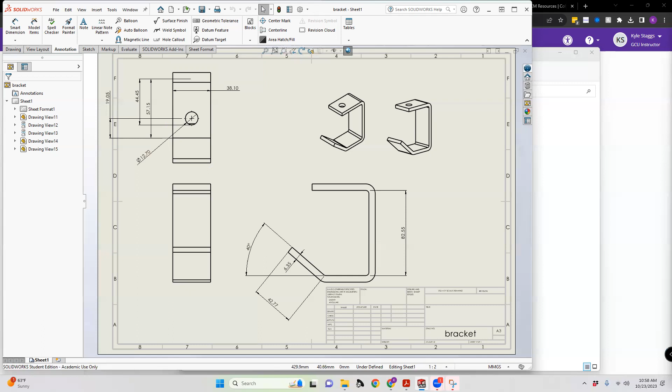And that way you guys can actually access them, and that might be a little bit easier, because the default is you have to save it as a drawing first, then you can save it as a PDF, because reasons. So I'll pause this for a second and do that real quick for each of them so that you guys actually have the PDFs, and then I'll update in the class what that needs for that one.

All right, so starting from the PDF, we can see a couple of our key dimensions. Have to move our toolbar a little bit out of the way to make sense of it. But what this is going to do is give us our starting point, which should be something about here roughly. I'm going to narrow this just a bit to make life a little bit easier, be able to see a little bit more of what we're working with. And this way I can switch back and forth between some of the different drawings a little bit more easily for the purpose of the recording.

So you want to start with the base. It's kind of an important piece of it, and you'll see why shortly. This is meant as a mechanism to retain the U-joint. So this bracket is pretty straightforward in terms of how it gets created. Number of different ways that you can do it. You can do just a simple line drawing. We haven't done a lot of those, so we'll do this from the front plane, and I'll make adjustments to our view. So we'll start at the base corner.

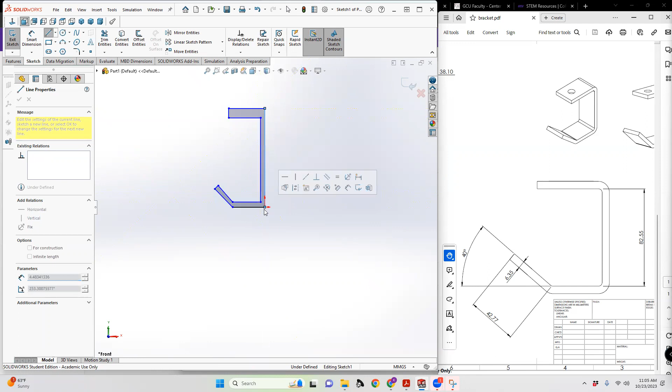Want something that is parallel, and we'll do some rounding later. So we get a rough geometry set up. As a starting point, come in and use smart dimensions. 82.5 millimeters or 82.55 millimeters is the interior distance plus the exterior thickness. So 6.35 plus 6.35 for the thickness on top as well.

This is why when you get to learn GD&T later from folks who could tell you what that stands for, I say in jest, you have a lot of options for how that can be done. You have a lot of options for how these things can be treated. But at the end of the day, what you want to make sure of is you're accounting for all of the tolerances for all of the parts that you're paying attention to. So we need to likewise make sure the distance here is 6.35, because otherwise that'll create issues with the part on the hole. So this length here to here, 42.77.

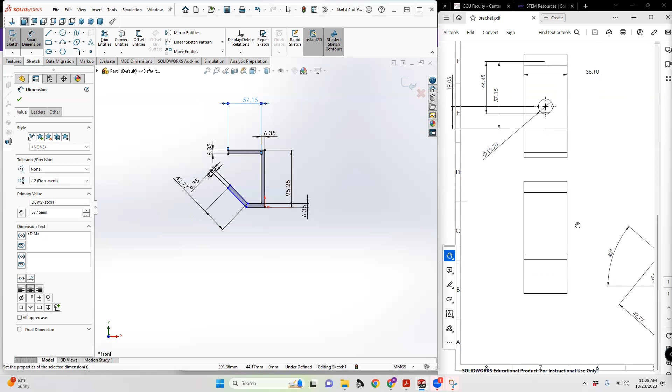And that means we can, from the rest of this, get some of the information about how far out this actually goes, because you see what the relative ratios are. And so you know that very likely this leg has to be about the same overall distance as this front leg, or very proportional to, because we're still way outside of the desired ratio here. So 57.15, and then what we need is this interior dimension.

And because this is approximately symmetrical, you could do some additional measurements. This might be one of the dimensions that they leave off on a part, and so you have to scale it. And so let's take a look at what 42.77 looks like. So that looks like that comes down right about the center line, or just above the center line. If we did the same thing, that would come down just above the center line. So that dimension is probably about correct.

The reason that it doesn't automatically display is when you're using these sections, and you're using some of the autofill dimensions from the part, if you have radii and things, it will default to taking some interior measurements and not giving you all of the detail there. So those are important ones to note.

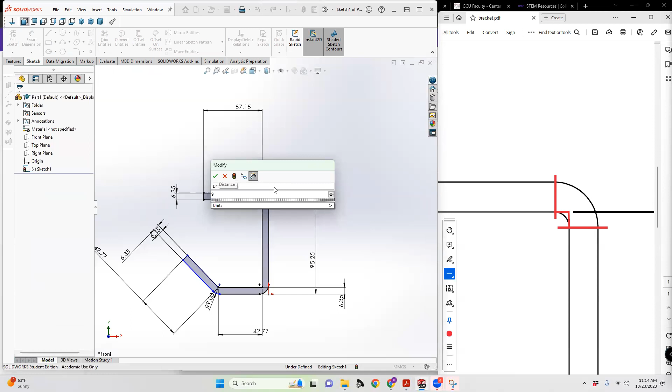So if you have a radius here of 9, for instance, I think you're pretty close. 9 minus 6.35 is going to be the next radius. So this one is going to be 9, and this one is going to be 9 minus 6.35, so that you can take into consideration those two. So then what you have is the two lining up and looking identically placed, right, with about the same thickness. Those two would line up.

So this is how you can do some quick estimation if somebody gives you a drawing and they haven't necessarily given you all the dimensions, like in the assignment, where we're not going to give you all of the dimensions because we're mean that way. What that gives us is the operating parameters. So somewhere around 9, it might have been 9.35. It had to be more than 8 based on this, but this gives you what I keep referring to as an aspect ratio.

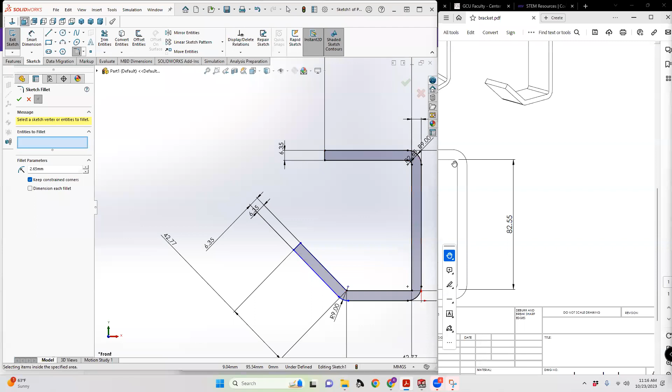So if we look at this side by side and we bring this in, those look virtually identical, and that's why. This one, same thing. It's also going to have a radius of 2.65. And then this interior has a very small bend, so it's also going to have the same radius, but very, very small. So now we have all of our radii accounted for. We have our dimensions, and we figured out the pieces of information that we're missing based on the aspect ratios, how big something is relative to something else, right? So now we need our top piece and we need to do our extrusion.

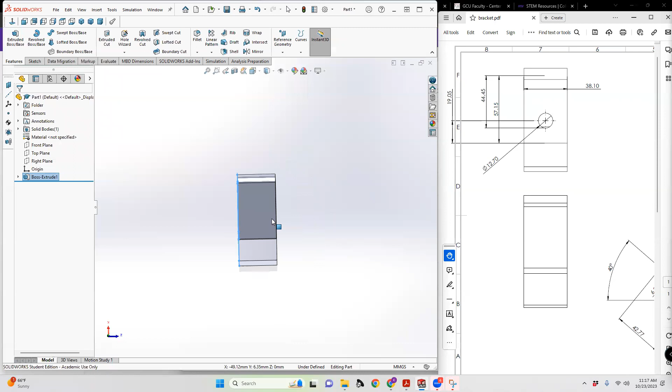So we're going to jump out of the sketch fillet and we're going to extrude first. And our extrusion width is 38.1. So 38.1. And I'm going to square this up for a top view. So what we're doing is we're now recreating this. Note that the bold lines are the things that are closest to you. The faded gray lines are a little bit farther away. So those are important things to incorporate.

So now we need one more sketch. We need it to be on this top plane of this part. And we need to jump from one edge to another, but we need a center line from which to do it. And there's a reason that we want a center line, just because this gives us a really solid anchor point. We can use another center line somewhere. I don't want to associate it with any other points, center lines, corners, fold lines, or any of those things. I want to be able to control the dimensions so that I can get this 19.05 spacing that I'm looking for.

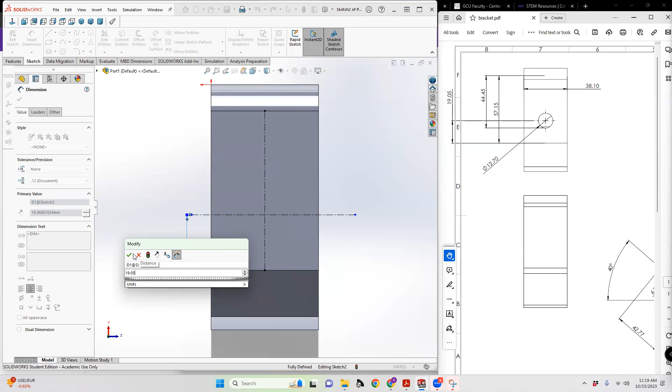No, that is not the smart dimension I need. Every once in a while, SolidWorks likes to help. Or if you buy a mouse on Amazon, sort by cheapest, sometimes you get a double click when you don't need it. All right. So 19.05. And then we need our through hole that's going to be at that intersection with a diameter of 12.7.

So now we can do our extrude cut from the sketch plane, which is fine. But what you want to do is change it to up to next so that you're not doing a through all and messing up the mass, center of mass of the part, etc. For this purpose, we're not necessarily going to be changing the material for this one. What we're doing is just creating each of our individual parts so that we can make an assembly.

So this one's done. We save as, and then we say, let's do, I'll bring it to this semester's folder. And I'm going to create a new folder because this is going to contain all of the parts. This will make it easier to find stuff later. It's not just a random assemblage, it's an actual group of part files all together. So this is the bracket. This is the first part. We're going to create a couple more pieces.

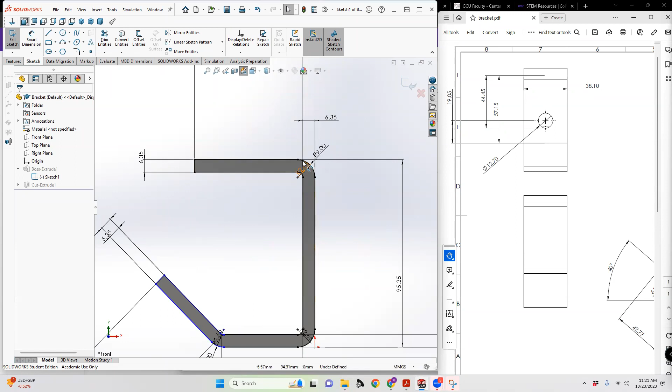The fillets, this is part of the reason why I wanted to make sure all of the details are in the recording, because the fillets themselves, what I did were sketch fillets. You could do the fillets after the fact as well, but it's going to be easiest to visualize here. What we were doing in terms of reference was taking a careful look at the part and inspecting some different radii for things. We found that 10 was maybe a bit aggressive.

10 is a little bit too far toward the top of the part. Based on the interior thickness, we can estimate what that thickness needs to be pretty closely. And that's why we needed to zoom in to see where the lines actually start curving. So from here, it's not quite a third of the thickness, a little bit less, to be able to figure out what these radii were. And the difference is we need to be able to measure.

We need to be able to measure. So from here, I'll do it in red so it's very clearly visible. In red, we have our semicircle here. So this is an arch. We know the distance from here to here. I'm going to do this in green. We know the distance from here to here is 6.35. We know that's uniform throughout the whole part.

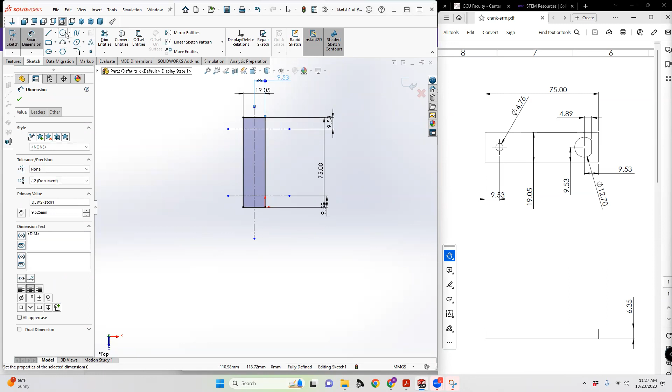So we zoom in and we have one. We zoom in, we have another. And then from this, we have a line that we generate. We're not going to associate it with any other points or references except being horizontal. And we're going to set the distance from the line to the center as our 4.89. So then we come in, trim out the unnecessary sections, and we're left with our D-shaped crank hole. And this is a radius of 6.35.

This one will only give you radius because it's an arc at this point. So it's not a full circle. You can't specify a diameter once it's already been cut. Just one of those things to note. If you're trying to figure out how to do something, remember you can always divide by 2 or multiply by 2 to get back to the number you needed. So we extrude this by 6.35 millimeters, and the crank is done.

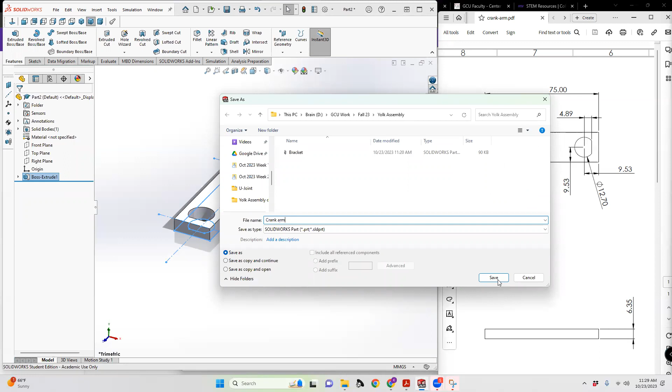So now, this is the crank arm. Okay, so this one can go away. This one can go away. Then we also need the crank knob. I'll go ahead and open the rest of these, because then we get to basically do an intensive lesson in how the assembly mates work for a multi-component assembly like this. And that's why I chose this example for today.

So there's a lot more detail to cover. This one is a little less obvious how to proceed. It tells you some things, but you have to figure out what things it's telling you. I left these intentionally a little bit unclear so that you guys had to think your way through what this looked like. A lot of times we're going to use a given radius or range of radii for a part to do something. There's a couple of ways that you can approach this. The first is you can do a bunch of extrudes and extrude cuts, but can you guys think of an easier way to do it?

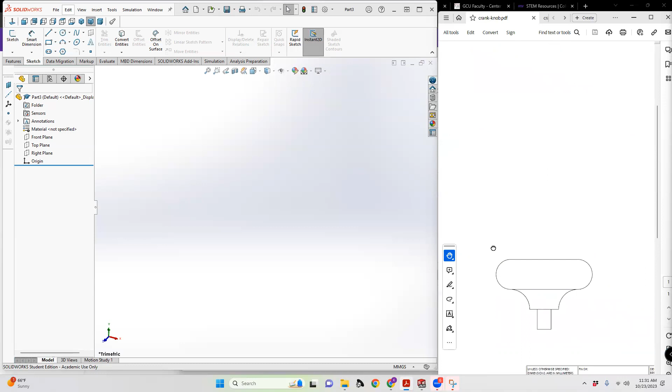What's this an ideal candidate for? Before you guys think in terms of, I'll just extrude a bunch of discs and then do some filleting at the end. What's a better mechanism to use? Yeah, exactly. A revolve extrude, because you can get most of what you need in terms of the geometry and it's symmetrical. The reason you know it's symmetrical is comparing the side view and the front view, and both are identical. So this is a symmetrical part, which makes your life a lot easier.

So you start with a center line along a front plane. All right. Recenter your view so that you've got an idea what you're working with, and then draw half of the part. So you know that there is, and this one can be done freehand. We'll go ahead and do that so that you can see what it would look like. Here and here and here and here. Okay, so this is your freehand line drawing of this.

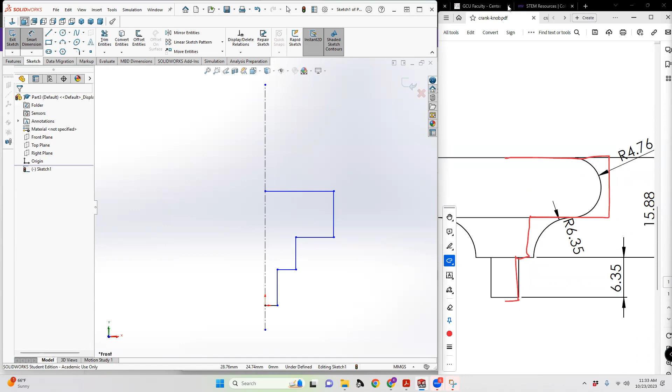And I'll show, just for the sake of completeness, what the goal is there. I'm focusing in on this half where I've got this line. I have this box coming back to this line, coming back down, and coming back down again. And this is the half that I'm drawing so that we can bring in the radii later, because all I need is a few of the key dimensions. So I'll go back to the pen so that you can see what's going on there.

That means that I know what the height difference is here to here. So here to here is 15.88. And I know here to here is 6.35. So there's a bunch of these dimensions that you'll recognize from some of these other parts, in terms of some radii and things. That's to make the actual end part a little bit more uniform. There's a bunch of reasoning behind that, actually, but there's good reason for it.

Now, they don't give you the overall diameter of this, because in the part drawing, what they're going to do is give you a couple pieces of the information, but not all of it. So one thing we know, for instance, is this radius is a sweep of a full 90 degrees. That gives us some very important information. So this here, we can start by, there's a couple different options, but the easiest way is going to be not to go ahead and move it.

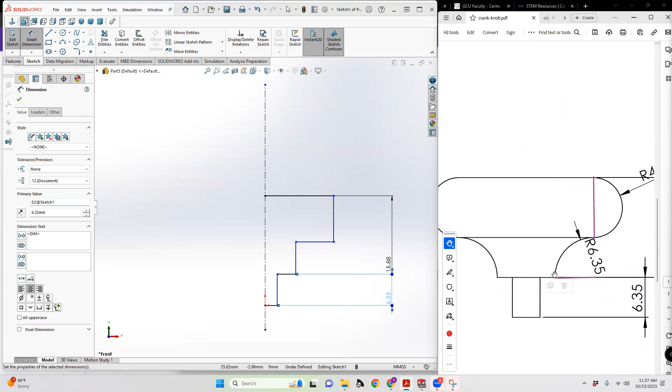And if we know that radius, then we by default know what the rest of it is, based on the other things that we've learned. So we're going to set this first. We're going to set the distance between the center line and this point as 4.76. Then we're going to set this arch because we know, having just built the part, what dimension this pin is going to need to be. So 6.35, you should recognize from the last part. Somebody go back and look at that part drawing and see what the diameter was of that pinhole. And I think you'll find the other answer that we're looking for there. So this point is going to have a sketch fillet. It can't be 10 millimeters, but we know it needs to be 6.35.

I'm going to clear selections and use it here. There we go. So we know that goes through a full 90-degree sweep. 6.35. We know this is spaced correctly. And we know this arch now. We can make the distance between this and this to be 0. So what that does is that effectively eliminates that center section.

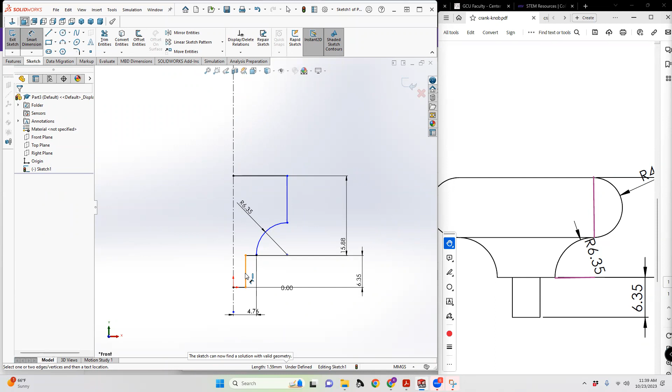So now we have our 6.35. And we know, based on that crank arm drawing, what the diameter needs to be, because the diameter itself is this 4.76 right here. So we know this has to be 4.76 divided by 2, and that locks in this dimension. So now we have this radius. Now we have the upper arch that's going to give us what we're looking for in terms of the radius.

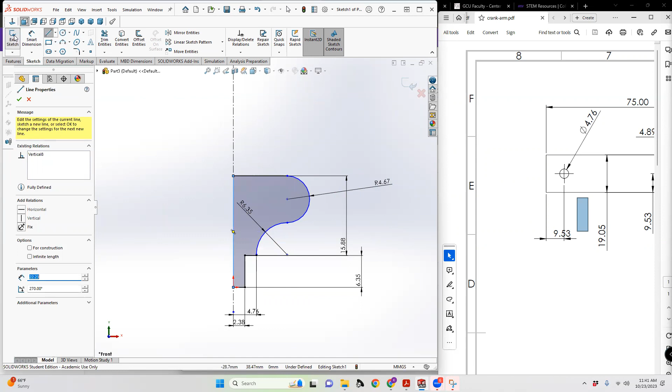And what we're going to do is we're going to do both ends. So 1, 2, and then 3 happens to give us our radius of 4.67, because this arc has to be 90 degrees based on the relations and the constraints. So now we eliminate it, and now we have our revolve. We're going to go ahead and connect this so that we have an enclosed area. But what that does is that gives us enough now that we can do the revolve and give us our part.

So we have our knob. We'll change the material on this one just to distinguish it. We're primarily concerned about the appearance. So maybe we'll do something like a beryllium copper, give it kind of a nice red color. I've seen that referenced in a couple of those drawings. Yes, we need to save that.

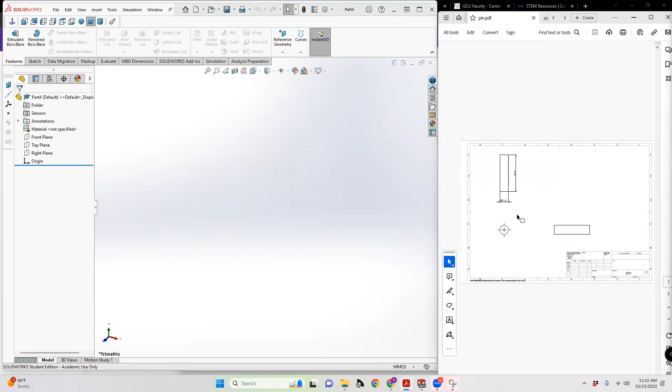So we've got a few more pieces. This one we don't need open. This one we don't need open. This one I'm going to leave open in case we have to make a minor adjustment because of constraints. I don't think we will. But let's go back to the pin. We'll need 2 of those. We only need to make 1. This one's going to be super duper confusing.

All right. So 9.4 over 2. Extrude to 38.1. And I'm going to make these in something that we can see. Again, I'm going to change the materials just because something dark like ductile iron, so they'll be clear where those parts start and end. I'm going to save that as the pin. All right, so that we won't have to change dimensions for.

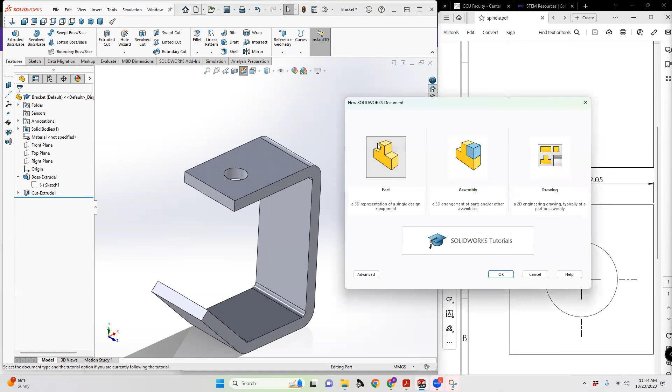We're now going to go to the spindle. All right. 19.05 square. So we need 1 more new part. None of these parts are particularly challenging. That's part of the reason why I like this as an example. So we'll do right plane for this. Number of ways that you could do this. It's also important to understand that this has through holes, so it's not a shelled part exactly, but it does have through holes.

So there's one sort of trick about the way that this works, and you'll see that when we go to put together the assembly, because the front view and the side view have about the same properties. So the side view and the front view. So this has a through hole going along on 2 axes, but not through the top and the bottom. So that's going to create some interesting intersections in the part. So we'll look at how to at least know that those are there as well.

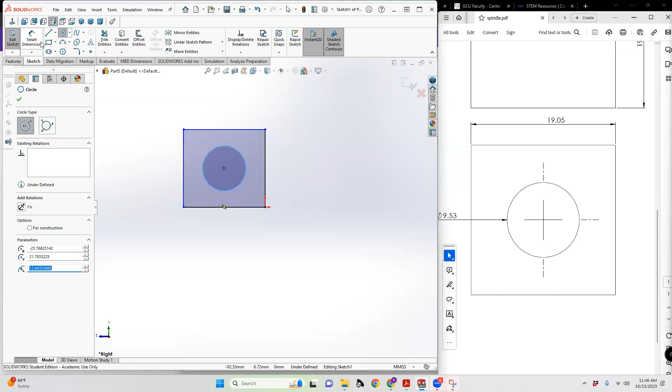So 19.05 on a side. And you can reference the 2. So we can do that just by touching either of them and referencing. Kind of saves you a couple steps if you are trying to work efficiently. It can make life a little bit easier. So 19.05 on a side.

So a couple ways you can do this, one of which is to cheat and set the distance to be 0. Then set your diameter to be 9.53. All right. What you can do is then extrude this, and we're going to create the cut on the other side as well. So this is actually a cube. So we've got the top view looks the same, but now we need the front view to look the same. So easiest thing to do is another sketch on the front, reposition to make life a little easier.

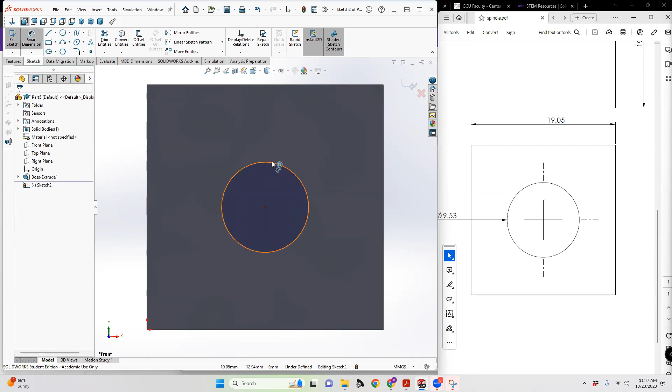So referencing both of those midlines without clicking, you just sort of drag them across. 9.53. And we do an extrude cut all the way through. So now we have our spindle.

And this technically will create interference with pins. It's normally done just a little differently than that. Normally the pins are offset, but because of the clearances in this one, you have to use this square part, so it creates a little bit of a strangeness to the part. To have a spindle, it has to have multiple pins, but understand that this isn't a real mechanical design that you're putting into production. This is just a reference to understand the assemblies.

Spindle. So then we have the two yokes, and then we're done. So this front and side view are distinct to give us an idea of what's going on. Make sure I can see well enough. All right. So

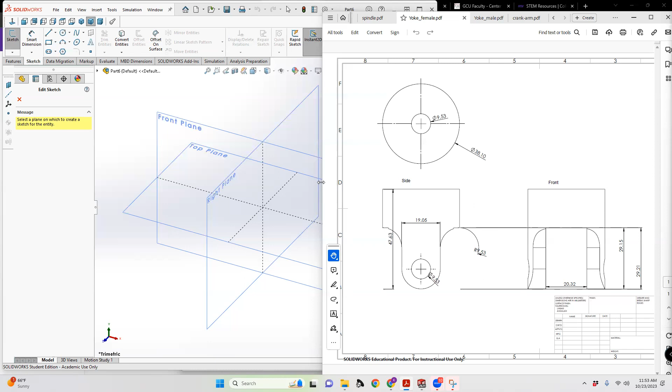So the answer is, in short, there really isn't a wrong approach to this one. Really, your operation has to be 3 steps. It can't be less than 3. It's not reasonable. So we're going to start with the couple that are debatably the most important. And what that is, you can create the cylinder and do an extrusion there. The geometry that is the most symmetrical throughout the entire part is in fact the cylindrical part of it.

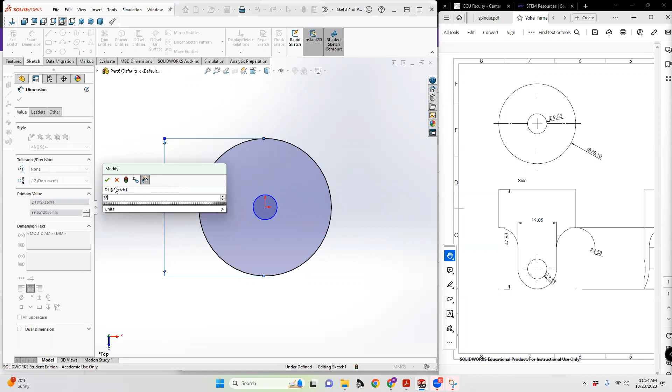So in this case, I'm actually going to recommend, for the sake of speed, you would start with a top view to make something like this sort of a geometry. So you have an inner circle, an outer circle. Because as nice as it would be to do this and do a side cut, you're going to have to do, in this case, all 3 of the sketches on 3 different planes, no matter what you do. So 38.1, so everything has a consistent width. 9.53, and we extrude 47.63 from our drawing.

So now this is the new top. So we're going to do a sketch. We're going to do this referencing the front plane. So just for the sake of not being confusing, I'll actually do a right plane sketch. So click or right click the right plane, add a sketch. I'm going to reorient our view just to make sure that I'm keeping everything nice and square.

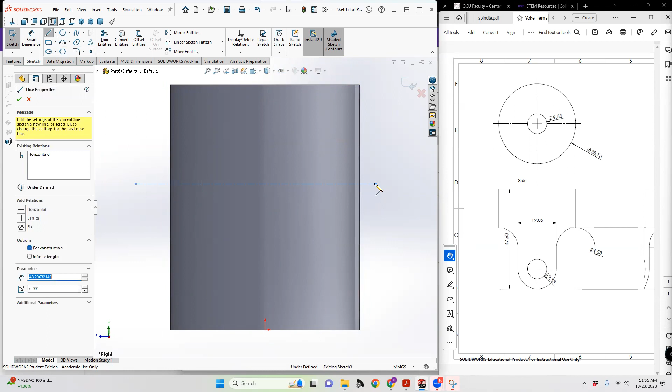So there's a couple things that we need to know, one of which is we have a reference center line going through this, and we have a height. We're going to need a center line through the center as well. These reference lines, again, are going to be immensely helpful to us, but we have to be kind of careful about how they're arranged. Because one of the things that we don't see, for instance, is much about the actual height. So we know this height to that top edge is 29.15. Okay.

So what this is going to do is we're going to create this sketch, and then we're going to go back and recreate sketch 2 on the front plane. It'll probably be named sketch 4 because reasons, but we're going to go ahead and get our circle in place.

So down here, we have a diameter of 9.53. We have an overall distance here, 19.05. So we know a couple things. We can reference the rectangle to be 19.05, or we can separate a couple lines by 19.05. But the rectangle is going to give us some distinct advantages. And in order to keep stuff centered, I'm going to reference the center line here.

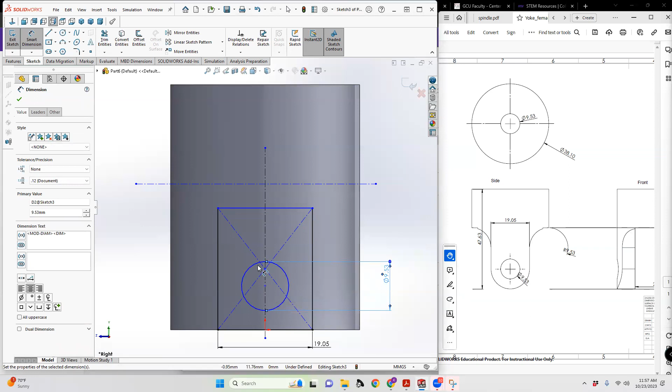So this needs to be 19.05. Now we know a couple of other things. We know the dimension of this, or the diameter, needs to be 9.53. And we know there needs to be this circle. Again, even though this information isn't strictly specified, we know that this circle is parallel by the thickness here.

So how do we know the radius of that circle? Somebody who's really good at math, tell me what the radius of that arch is. I'm going to set the smart dimension here to set our height. What do you guys think the radius is of that lower arch, since they didn't give us the dimension, except they really did? So if we did a center point arc, I'll do it here somewhere else just to give us a reference point.

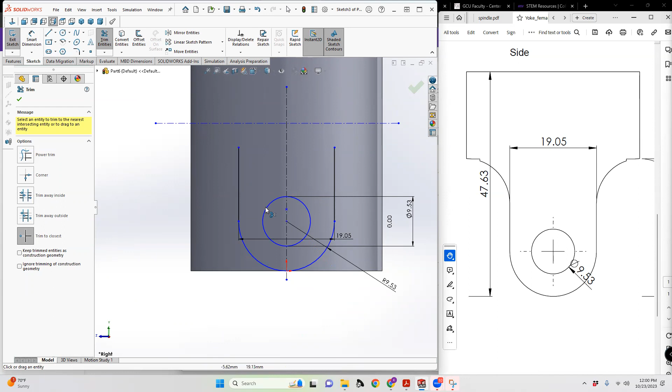Now, in order to do an extrude cut in the way that you've seen set up here, there's another thing that we have to do. So I'm going to eliminate these and our cross braces because we don't need those now. Sometimes it can be harmful to eliminate that many references. In this case, we're going to be just fine because we need to do some filleting. Now, they didn't give us a height here, but we know something about the radius here, 9.53. So if we were to take an arc and bring it forward, we know the height.

We know the height here is 29.15 to the top of this rectangle. So 29.15 is what we're going to use as the reference. So this height is going to be our 29.15. And we know that this arch is going to come all the way up to this point. So that arch is going to be 90 degrees. So we know something about our arch here needing to be 90 degrees and a radius of 9.53. And it'll reach.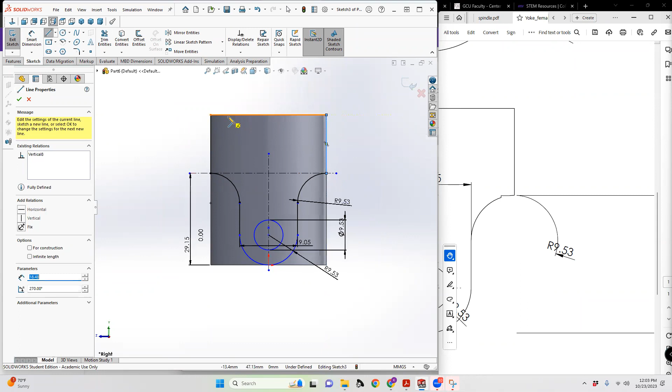Now, another thing that's actually pretty important, this boundary is going to need to cut. So think about this in terms of a cookie cutter. A couple things are going to be needed. We've got to connect the top here. So we've got to make this almost the inverse of a cookie cutter, and it'll probably make some sense why later. So what we're going to do is add a rectangle on the outside so that we have an enclosed region, and you'll see what region I'm going to pick to do the actual extrude cut.

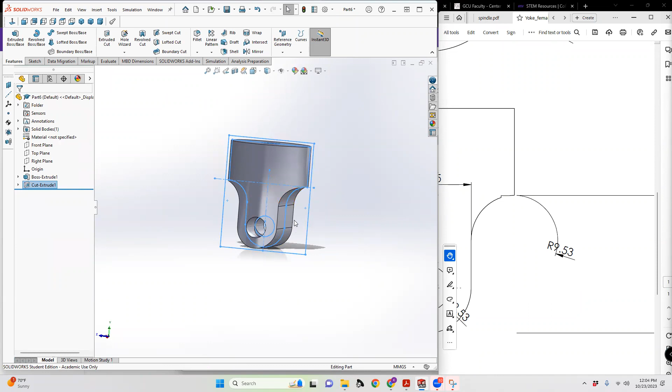This is a cookie cutter method, and we need the interior region there, and we need it to cut through all, but we need it to cut through all both directions. So what that does is this effectively creates a cookie cutter effect that stamps all of the material or cuts away all of the material in one go, because it's very hard to define. Sometimes you can get conflicts with interior edges and things. If you haven't done your dimensioning or mirroring very properly, this will save you quite a bit of headache and or time just to throw an exterior rectangle on.

Now we need to do this one, which is going to be our front plane sketch. And this one's going to be the quickest of all, because we know what that needs to be. We have a center line. We have a center rectangle. We have our smart dimensions of 29.15.

29.15, and then our width is going to be 20.32. And we want to set this distance to be 0. And what this is going to do is create the cut. The reason I did this in order of operations is simple. I'll do it with the other order of operations to show you what I mean by that.

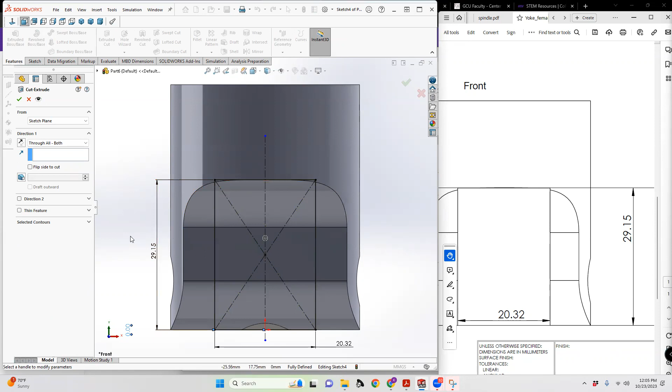But here we're just going to take that interior region and do an extrude cut of this whole region, and it needs to be through all both. There we go. Even though through all both was selected, that creates an issue. So note this,

this particular feature, this notch, would not be present if we had done it the other way, because we would have ended up with a different reference point, and these two pieces would have been joined on the side. So doing it specifically for this order of operations is what gives us our particular geometry. So now, here's another interesting thing.

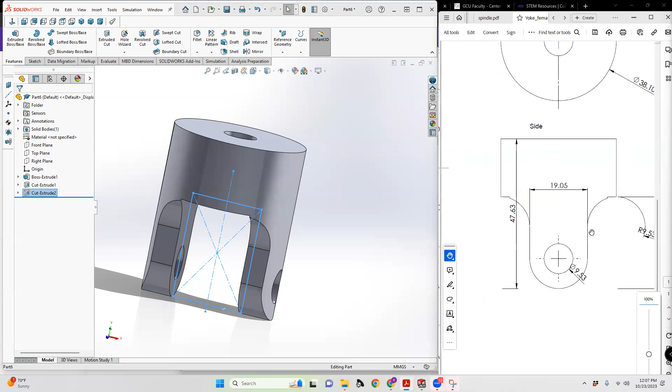If we take all of this information and say, okay, that's the female part, so we save it. Now we have one more part to create, and that is the male yoke. Okay, so this is the counterpart.

Now, what do we notice about this yoke? Anyone notice anything interesting? What do we notice about that yoke? Are there some similarities in dimensions? Yeah, exactly. The other yoke basically is the same geometry. Looks like it's the same overall height, 47.63. But then it just has a pin on the top.

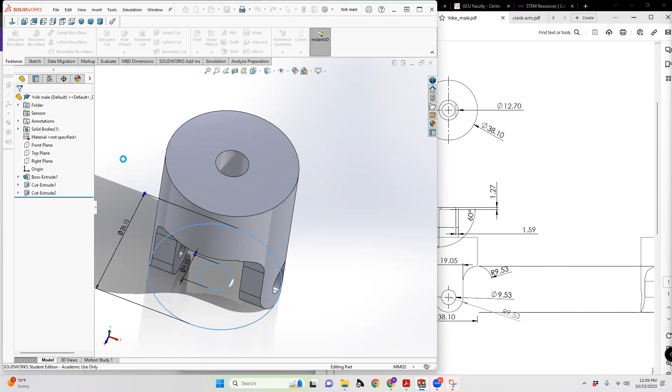So what we can do is take advantage of this part, save this part with a second name. So we can say yoke male, save it. What we can do is another boss extrude. We're going to pick from this original sketch. We're just going to pick up to next. Actually, we're going to pick from surface, which is this surface, opposite direction.

And it's not going to allow up to next. So we're going to do up to another surface, which is going to be this face. And we're going to select for the contours not the whole of sketch one, but just this interior piece. So when we do that, we fill in the top of the yoke. Then we can create the entire rest of this geometry all from right here. So how do we do that?

Well, we pay attention to this part of the geometry, try and make it as big as I can. We know what our extrusion height is going to be, and we can taper it at the end. There's ways to make that easier. There's ways to make that harder. The easiest is going to be to come back in and do an extrude cut for this small section, and we'll show how to do that. So order of operations does matter, just like it does in math. It matters in CAD work.

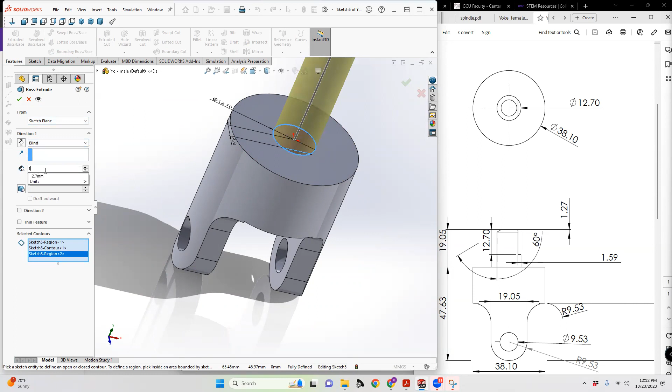So our total extrusion here is 19.05. So we're going to extrude this region and this region. So these two, we're going to extrude both blind 19.05.

All right, now what we're going to do is a note that we lined this up. I didn't mention it specifically because of having the part oriented and going back and reframing correctly using the geometries. I didn't have to think about, oh man, I got the D cut on the wrong axis or whatever. It was already on the correct axis because I knew what reference I was working from because of the top view, and using the top view as a default, I knew where I was. So defining right side, left plane, right plane, all of those seemingly dumb details do in fact matter, and they matter significantly.

So instead of a fillet, we're going to do a chamfer of this edge, not of the face itself, but of this edge. And we're going to do an angle distance combo. What this is going to do is give us our 1.27 that it's looking for, 1.27 millimeter and 60 degrees. But you can see that's not quite, it's 1.27 on this. Yeah, okay, it is 1.27. So specifically the 1.27 distance on this axis and the 30 degree. Yeah, so this is actually the correct chamfer for this.

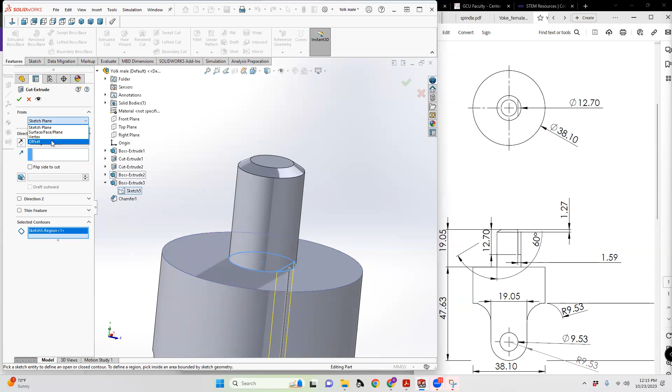And what we're going to do is an offset. There's a couple ways to do it, but you can also do it from this surface. So you could say from here and then just go down as a blind, and it would be 12.7. So you could do it this way, and this will give you the correct cut. There's a couple others. This is probably the easiest to conceptualize, probably the quickest in terms of time. So that's probably what I would do. So now we have the male part done. We didn't have to go back and recreate all of that nonsense. So the male part's done.

Now we can finally go to put all of this mess together. So how do we do that? Well, we go back to our base and we say from our bracket, make sure that's saved, make an assembly from the part. And now we're going to get into the greater detail. So the bracket, the spindle, these are the things that are currently open. So we're going to do a bracket.

We're going to bring in some of the other parts. So we're going to go ahead and bring in a spindle, which we're going to need. We're going to bring in the male yoke. We're also going to bring in the female yoke and the pin and the crank knob and the crank arm. And so we're going to place these, the pin, the other yoke. All right. So we have a bunch of gobbledygook. We're going to need one more pin. So it's easiest just to insert the pin one more time.

All right. So we can notice a couple things about how all of this goes together. The first part that I brought in is the bracket. What that means is that is fixed. So remember the float fix trick. You want to make sure you have something that is fixed in a geometry so that you can understand what it is that it's doing. So what we want to do is start adding our I'm going to change all of my display style to be the same.

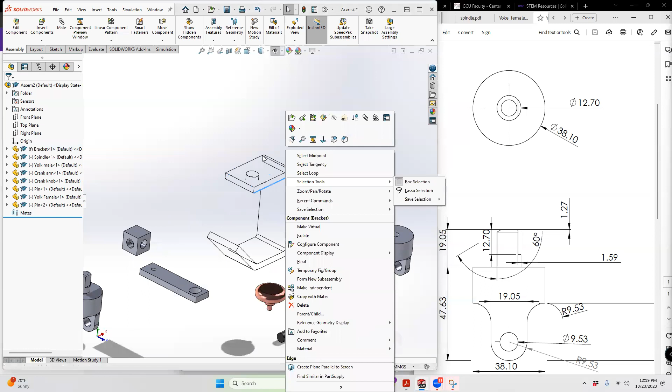This one right now is viewing as wireframe, but we don't want to hide components. We want to unhide. I want to show the components. So what we'll do is we'll start working with, yeah, we actually don't want transparency, but it'll give us a little bit of better visibility as we go to start aligning a couple of these parts. So first thing to focus on that's going to be a little bit easier is going to be putting together at least the parts of the subassembly.

So, and there's one more, actually, I think there's one more part. Yeah, the actual crankshaft itself. So not the crank arm. There we go. Yeah, we missed this one. So we need this one more coupling part in order to make this. Now, here again, we can make some use of this part, but it's actually going to be a little bit harder to do, but not impossible. So let's do that real quick.

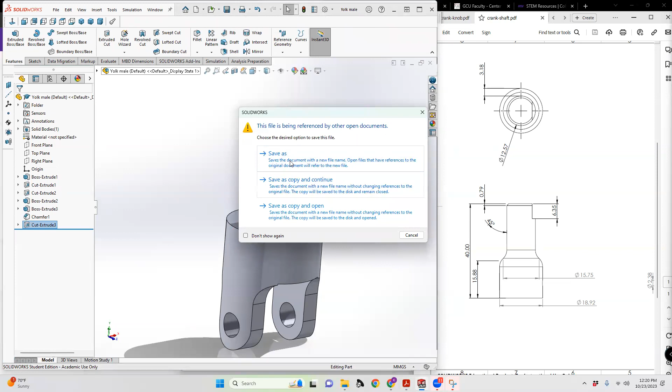6.35, and so we've got a couple changes to our taper. Okay, so I'm going to teach you real quick one more thing about how to repurpose a part, because we are going to need that. When I'm going to go back to this part drawing, you can see there's some similarities between these. The base circle is still 12.7, but we need to change some of the parameters, the taper, the depth of the cut are the main ones. So that's what we're going to do, is we're going to resave this part as crankshaft.

We're going to resave this part. That way we're not messing up the part that's already in the assembly. It's really, really important to do that. So we're going to edit this feature. It actually needs to come down now, 6.35 as the thickness.

The chamfer, we're going to edit. So it's actually going to be 0.79 and 45 degrees. So slightly different chamfer. All of that stuff messes around with your part mass slightly. So things that you really need to pay attention to.

Now, how do we turn this into our base? Well, what we can do is, so long as we've got an overall height that's the same, we can start from this side. So we're going to adjust our view, again, trying to keep things square. We're going to add a sketch, and we're going to reference the right plane.

So in this sketch, we're going to add a center line. Okay. We're going to start at the top. That's interesting. That is slightly off. I'm going to redo that center line because I think that was not actually completely horizontal or completely vertical. There we go. So now it's positioned correctly. All right, so we have a slight difference in what it's treating as the center. So these two, it now has a point of intersection.

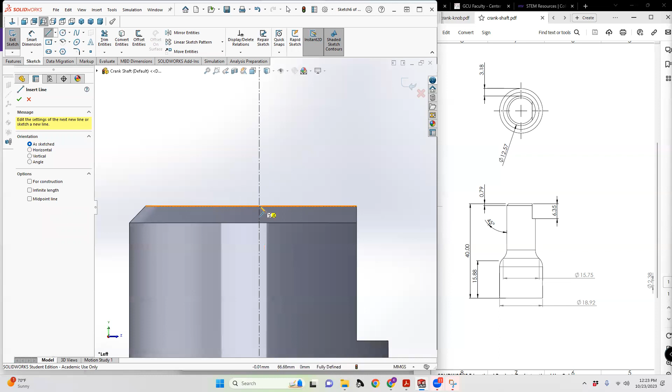We are actually going to reference, it'll be easiest to visualize, I guess, with a line. So what we're going to have to do is a couple steps, an extrude cut and then an extrude fill in. You could recreate the part from the original geometry. It's going to be a little harder to do, but there's a reason why we're going to want to do this, and so we'll see what that is.

This gives you sort of a midline reference for the height. So it's not abundantly clear what that's trying to show you, and that's part of the reason why they give you these two radii. But you also know what the overall base is. So you know this height needs to be 40. You know this base needs to be a width of, and you can draw it out.

You don't want it associated with any of the other points in there. This needs to be a base of 18.92 divided by 2. And then it goes up. And then we start our arches. So the first actual rectangle height is what this would be referencing. So this height is 15.88.

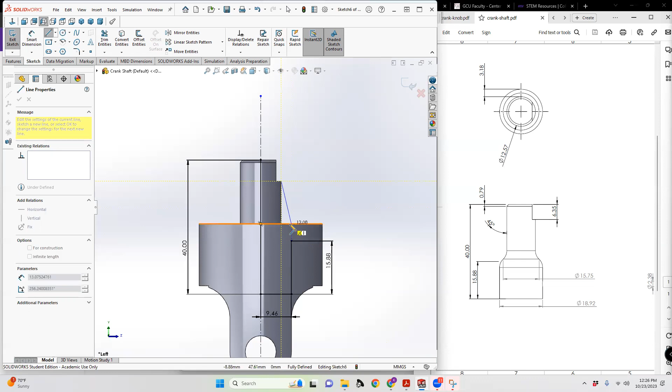Then that gets blended with this other arched piece. So there's a line that comes down. So you can do a line here. And at this same height, what we can do is measure where this changes. So we're going to go basically parallel with this and come across. What that's going to do is give us the reference points here and here to then, regardless of where those things start, we can start with a radius of 4.76.

So this is going to have a radius. You can sort of try and visualize it with a 3-point arc. But that's going to give you symmetry that's not necessarily helpful. So this is where a tangent arc might actually be really helpful. So we're going to go from something like, yes, it needs to be an end point.

In order to get a tangent arc, because complicated reasons, you're going to need a point up here to reference. Same thing, you're going to need a point down here. Those points need to remain blue so that they're not fixed to anything else. So we go back to a tangent arc. That is an ending point. This is part of the reason why I don't use a lot of tangent arcs to begin with, because you can use a single point as an endpoint, but in this case, tangent arc is probably not going to be the most effective.

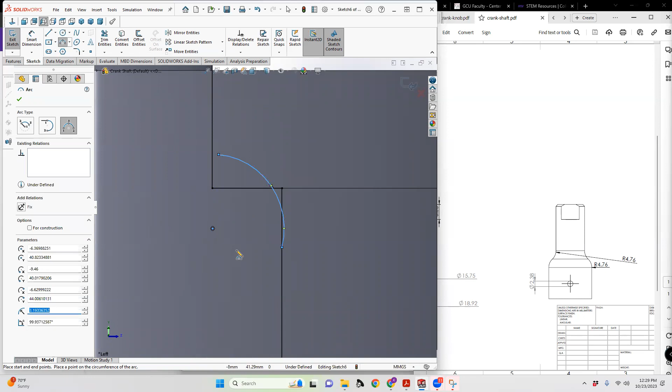I was trying to see if I could make this make a little bit more sense to you guys, but what we're going to do is generate a point out in space. So we're going to start with not referencing any other point. I'm just going to get another arc to make this make a little bit of sense, because the radius itself needs to be 4.76.

Then we need another arc to come in, and this point can be movable. This point is not anchored, so we can change it so that it's lesser of an arc. And then we can do the same thing for another arc, and a 3-point really probably is going to be the best for this. And we set our radius to be 4.76.

And what we're trying to do is move these points outside of, you want to get out of the smart dimension tool, because otherwise it's going to create some headaches for you that you don't want. Something like this, and then bring this point closer to the two so that you have kind of a free form shape that is connected.

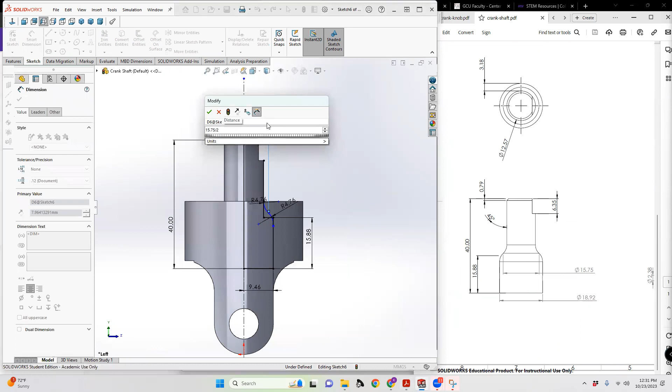The only other reference that you need is right here, a diameter of 15.75. So the smart dimension, the point here needs to be, smart dimension would actually allow selection. There we go. This should be 15.75 divided by 2. And so there is your correct reference for the heights.

And now we trim away the stuff that we don't need, including this piece in here, this piece, and this piece. Yes, even though there's some dimensional references. So we'll allow this to be cut off and flat so that we just have that arc segment, and then it's a pretty smooth transition.

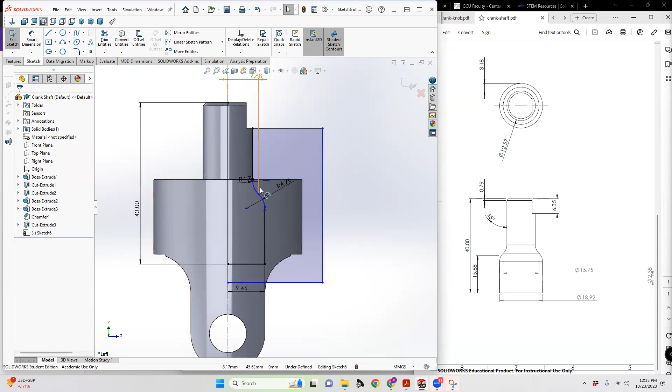All right, so now what we can do is take that geometry and use our same cookie cutter concept. Bring that up. So this is now an enclosed region that we can do something called a revolve cut, which you guys have seen before. We want to cut this region all the way around. Hit OK. Actually, we want to extend this down to the entire thickness for that very reason. Do a revolve cut this region, but we want it around this center line.

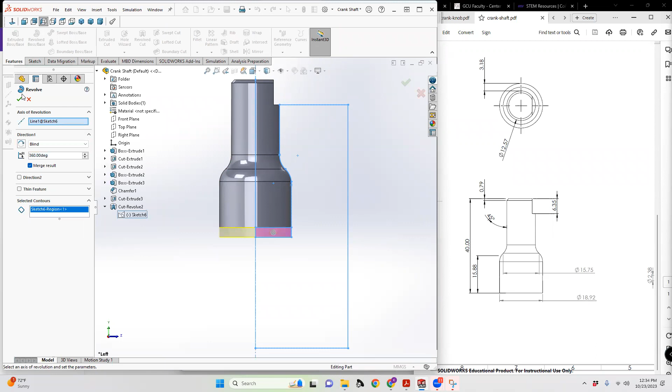So now I need a small extrusion so I can add one more line. So I'm going to edit that base sketch and readjust the view. That's really important for this specific operation. I need a line that references this plane, goes all the way across and is horizontal. And then trim this piece I don't need, so that then we can do a revolve to get the rest of our base thickness that we need. That needs to be from the same sketch, and it needs to be this small region, 360 degrees. Now I have the full thickness.

And on this front, there is a small pinhole for sitting onto the crank. Based on how this is supposed to sit, the interior of this actually should be cut out to match. Technically, for the purposes of time, we're going to ignore that small section. Actually, let's see. This is only going to have a depth of, tell you what, we don't have to do that. And here is why.

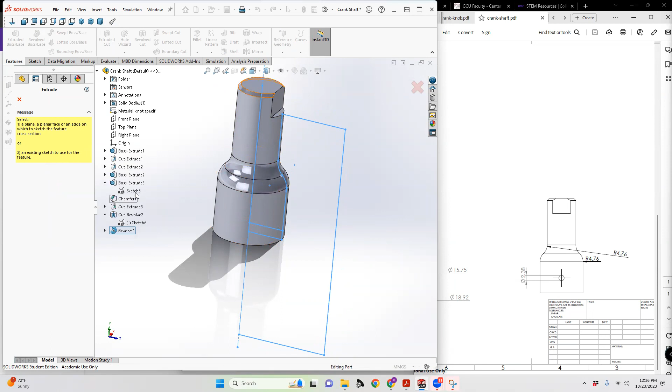We can go ahead and do that extrude cut in the base because we have this base sketch still, which is this one, sketch 5, I believe. So sketch 5, we can do one more extrude cut from sketch 5. And what we're going to do is an offset, just a straight offset of this. Actually, you know what? We're going to do it from the face. We're going to do it from this side. We're going to flip direction.

That'll make more sense. Blind, and the depth is going to be the same as the height on our, it's going to attach to the top of this. So we know that depth for this part is going to be 12.7. So we're going to do a depth of, let's see, we're going to do a depth of 11 because of this 1.27, and you'll see why. So we're going to do 2 steps. We're going to do 11 millimeter.

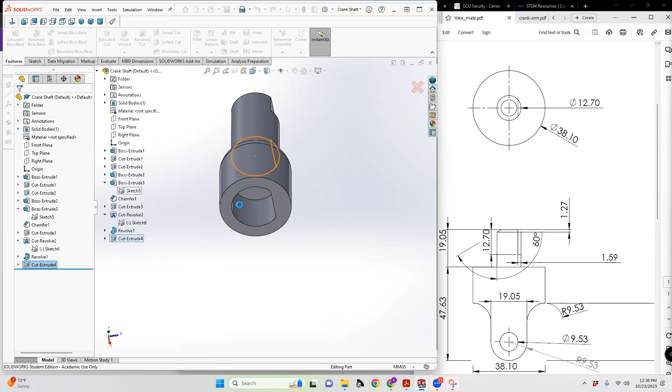So that's going to be to this base. We're going to pick the selected contours. So we're going to pick these 2. Actually, we're going to pick just this one because of alignment purposes. And we're going to do it from this base. That's going to set up our keyway that will make it easier to do a couple different things, and you'll see why. We're going to do one more cut extrude. We're going to do it from, again, sketch 5. We're going to start it from this face here. We're going to flip direction.

We're going to flip the direction, and we're going to give it a taper, and we're going to use this same taper that they gave us of 60 degrees. And we're going to do that for 1.27 millimeters. For this selected contour, we're actually going to do both contours.

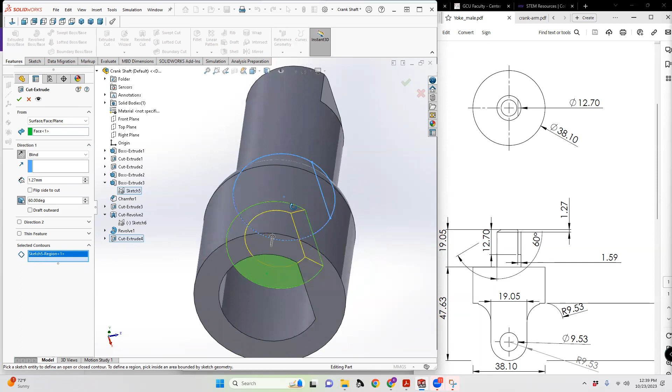But yeah, so it should allow, it should allow, all right, clear the selections. It should allow the circle region and this tapered region, just like this, which is what we want. The angle is going to be the same there, but it'll be a lot cleaner if we do it this way. So then what we have inside our part is a match to the D shape for our part for the top of the male yoke.

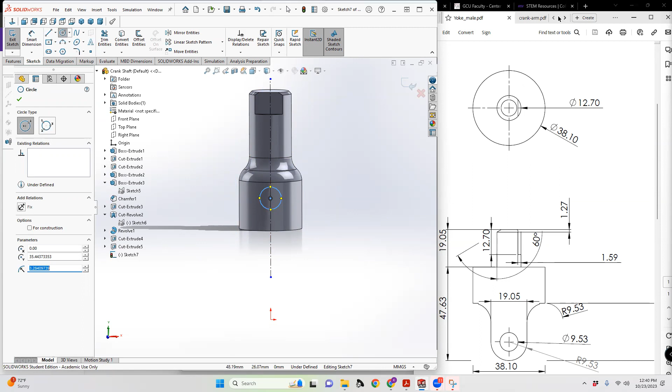Now, the only thing missing in terms of features, we need one more sketch, and we need to reference the front plane. Needs to be a small center line. Needs to be a small hole. Let's go back to this guy, 2.38 millimeters. So even though this started out life as a very different sort of part, 2.38 millimeters, and that's roughly centered on this edge. So what we can do is we can

orient our view, then we can do a center line, and we can cheat. This is why we like center lines. Instead of having to guess, do a bunch of math. Nope, not that smart dimension. Try that reference again. There we go. Every once in a while, it does something dumb with a dimension. Don't know why, just know that it is.

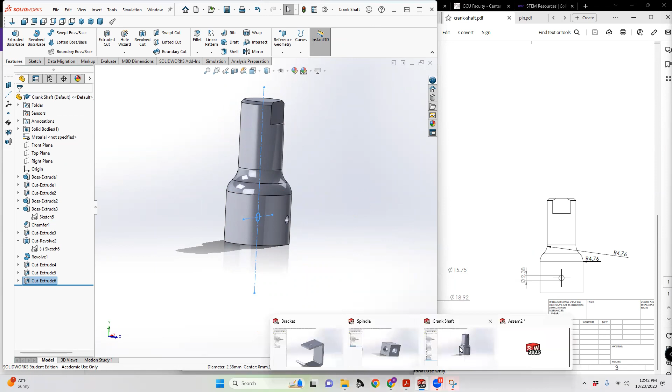All right. So now we do our extrude cut of this. But the trick is we need to reverse direction and say through all. All right, so now we have our pin hole for the keyway. What we can do is we can save this. This is now done, and we need that in our assembly. So we switch back to our assembly.

All right. We're going to bring in the male yoke again, just because reasons. So still there. Now, we've got all of the parts, and at long last, we can put it all together. So this is a much more complex assembly, but you could see something like this where all the parts already exist. So this is kind of the last in-depth part tutorial that we'll be doing for probably the majority of the semester.

Now we can start doing our arranging. So this is our fixed part. We want to reference everything else relative to it. So this part is going to be, we're going to start with our mate selection. So that face, I want to make concentric to this cylinder. I want to bring this face coincident, meaning they have a common joining point with this lower face. Okay.

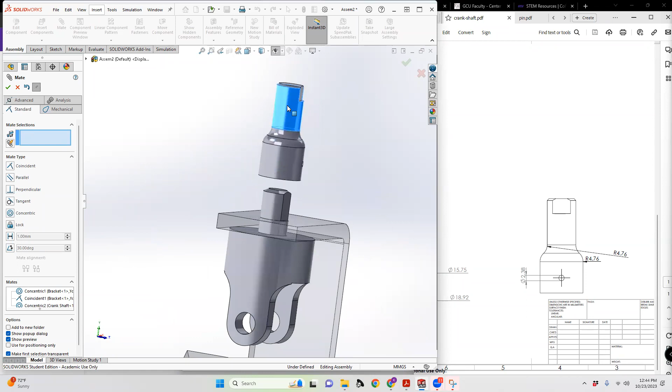Then we can bring our crankshaft up. So this cylinder needs to be concentric to this one. Okay. And this can still adjust in terms of height, and it can rotate, you can see. So what we want to do is add a parallel constraint, between this face and this face, so that those two are always going to remain parallel. What that also means right now is we can rotate them together because of that constraint. So it's an important thing to note.

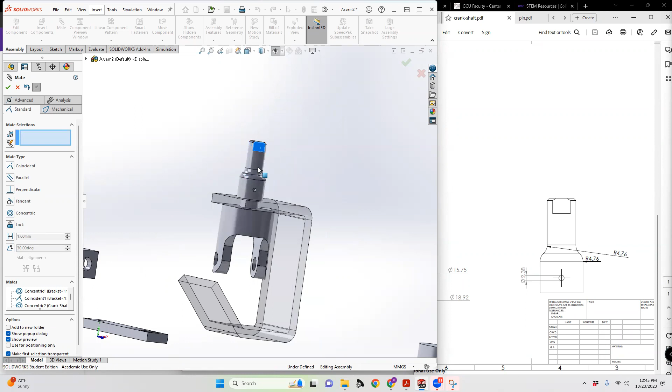So now we need this face concentric with this face. And you'll see what that does is that allows our parts to be matched up into that groove that we cut for this. So now we have those two parts, and now they aren't going to move, but they aren't constrained axially, which we don't want. We can leave this at something like a 90 degree, or we can leave it at an off angle. It's going to be easier if we constrain this in a way that it's roughly 90 degrees, just because of some things that'll happen later.

So we want to take this pin, and we want to go back to mates. We want to take this pin, clear selections. So pin 1, the actual face, I want to do this face and this face as concentric.

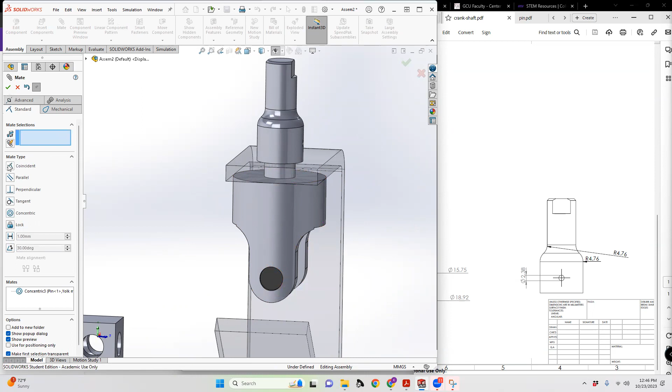And then we want to set the pins at a coincident point. Actually, this one is a perfect example of when to use one of the advanced mates called width.

What that means is I pick the faces of either end, and then I pick the face of this exterior. And what that does is automatically center something between the two. That can also save you a lot of time when doing alignments. It's just a whole lot easier. So we'll use the width for this one as well.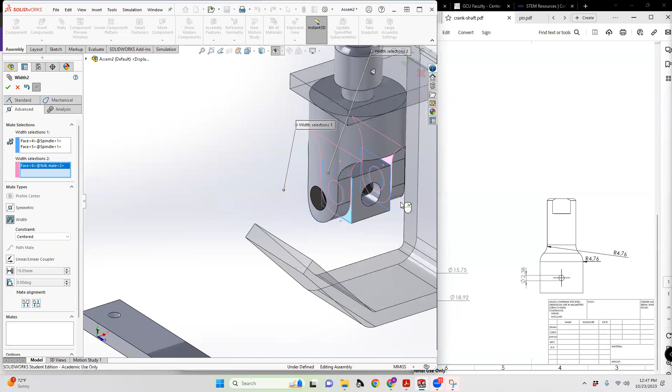So we want a concentric first. So concentric between this cylinder and this face. Okay. And then we want to do the same thing where we do a width mate, this face and this face, and you can do it to the interior faces as well. So what that's going to do is center the profile so that you have even spacing, which is actually really helpful.

And now we can drop in our second pin. So we want that face concentric to this cylinder. And we'll use the width mate for the edges and then the two faces.

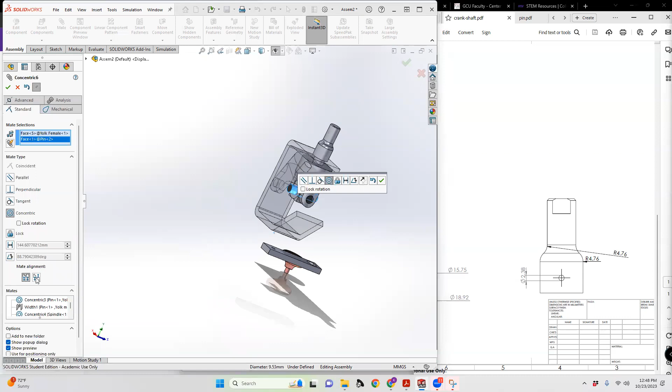And now we can go back and do our concentric with this circle. And what we want to do is make use of our anti-parallel alignment if it makes sense to. In this case, it doesn't necessarily make sense to. It's just going to rotate the part around. So we're going to hit OK. And then one of the things we can do is a manual rotation of this part.

So you'll be able to see, and this is where I said we might need to make a slight adjustment to the actual length of this. So we'll see, yeah, it looks like we need just a few more millimeters technically. So we'll get into how to do that and how to update the assembly. So we're going to do the same thing. We're going to do a width mate between this face and this face and these two faces. Okay, so what we can do is set the angle of this a couple different ways.

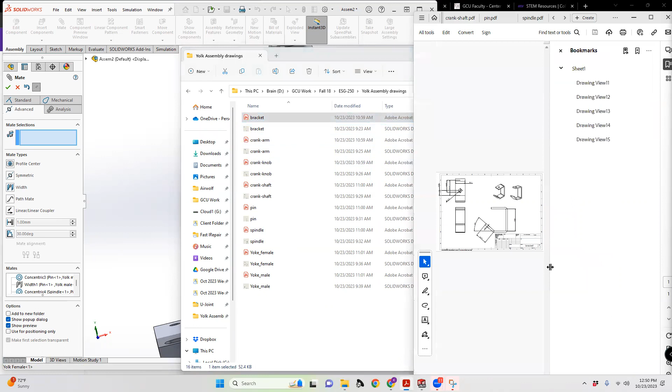We know what the angle is of our bracket, and so we're going to go back to that drawing briefly. We know what the angle is of our bracket, and it's 40 degrees. So that's one of the things that we have to verify in our drawing, because it may not actually be incorrectly dimensioned. It may be incorrectly angled. So we go back to the bracket drawing. This is why I left it open, because I wanted to leave something to correct, because that seems like it's much more than 40 degrees. So let's take a look.

So now what we need is an angle dimension, come on, Smart Dimension, you're smarter than that. So that is at 45 degrees, which is wrong. We want it to be at 40 degrees, which is correct. So we exit the sketch, we save the part, and that will update it over here in our assembly, which will ask to rebuild. Yes.

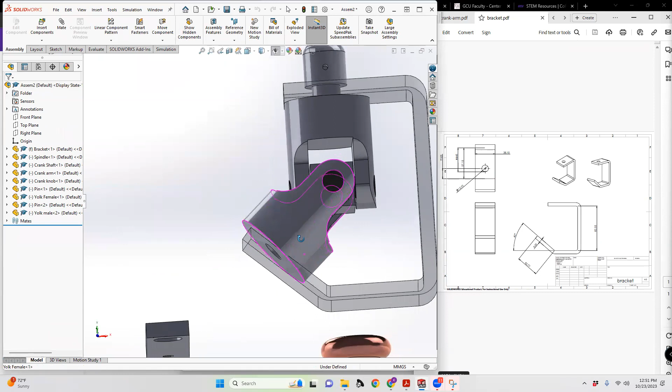So then what we want to do is, if we know this is 40 degrees, we could specify, for instance, an angle between these two parts by finding a flat surface on each of them. And we can specify what's called an angle mate. So again, something that you've seen before, but we want an angle between those two, and we want it to be... 40 degrees does not quite match up with this. So we need it to be the opposite side of the triangle.

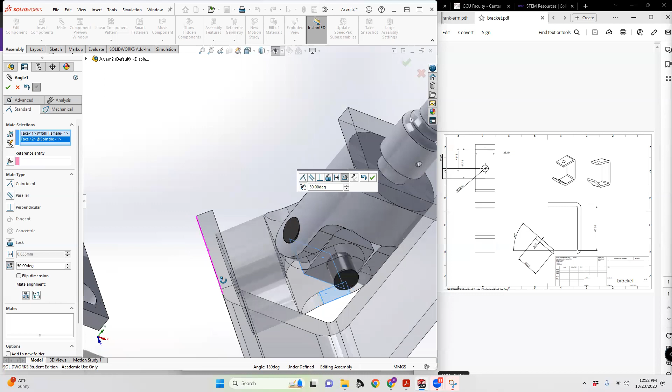In this case, interesting. This one looks like parallel is approximately a 50-degree orientation, which is interesting. So we might still need to adjust the actual length of that part because it might still need to be moved just a little bit, but 50 degrees is pretty close. Let me grab the direct side view here. Before we do this, I'm going to set a parallel and see if that helps.

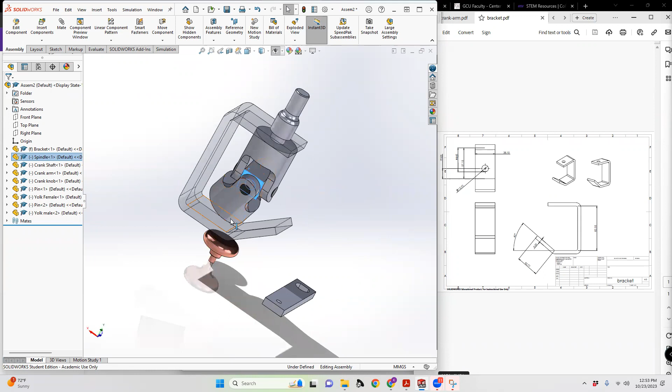Because one of the things that we haven't set, for instance, is this. So I'll get out of that tool. This part can move in that orientation, as can this one. So we've got multiple constraints. We don't want to set an angle necessarily for the purposes of rotation for this one. But you'll see some of the things that we can do if we do set an angle.

The easiest for this particular part is going to be to set up a mate that is parallel to this face. And by constraining it that way, yeah, it looks like that's just fractions of a millimeter off. So we might be 1 millimeter off in my estimation there. What we can do is then, as this turns and rotates, it maintains its angle and direction. So now we can put our crank on it. We can say we need this to be concentric to this.

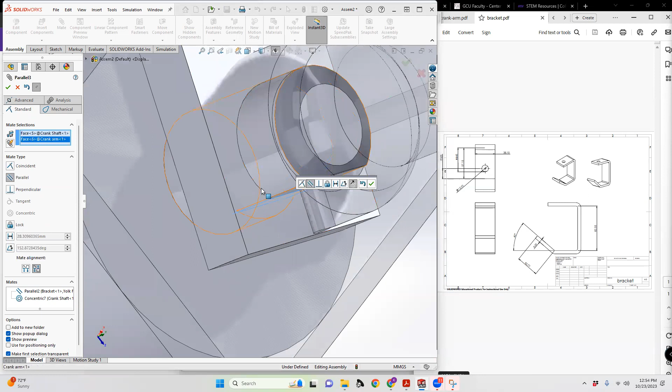We need a parallel between this face and this one. And we can do the top surfaces parallel. Actually, we want the top surfaces to be coincident. And then get our pin concentric with our crank.

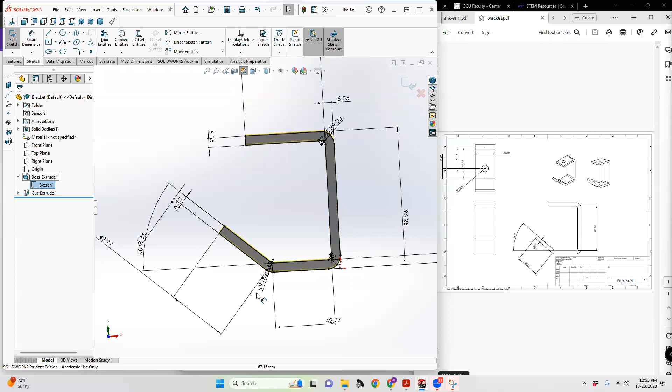And add a coincident between this face and this face. Okay, so what that means is then our crank can rotate around and our U-joint assembly, I want to fix that clearance issue just because it is annoying. On that base sketch, edit, we're going to do 43.77. That should be enough to get us our corrected geometry.

So I'm going to go back to the assembly. Yeah, reload those parts. All right, so that is roughly interfaced. There's a small collision there, but it's very close in terms of clearance. So it might actually be another 0.5 millimeter. But what this does is allows for the constraints, and you can see where technically the part does bind a little bit against itself, or it would in reality. So it wouldn't actually work at that steep of an angle.

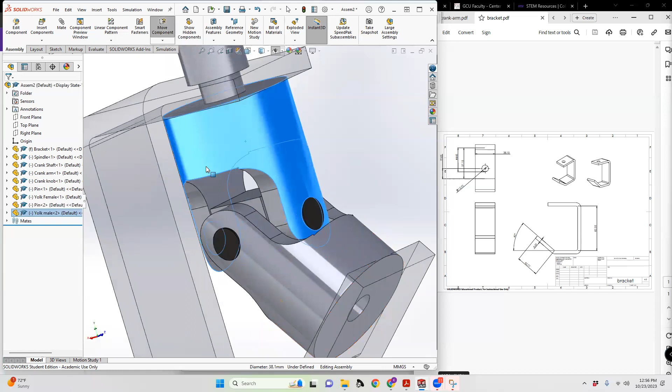So that 40 degrees is really, really sharp for most U-joints, but that's why it has to have the cutaways in the way that it does, so that those pieces, as they're sweeping through that range of motion, are not catching on each other and grinding. So that's why we have to be really careful with the design, and they have to be a little bit wider typically. So these walls would be made a little bit thinner, and there would be more tolerance on the inside. Is how a real part would be made. But anyway, that gives you an idea how to set that up.

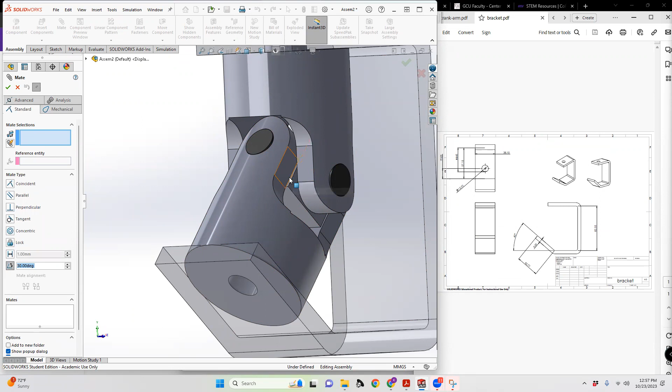If instead, I'm going to go to a 90-degree arrangement so that we have a reference. All right. If instead I wanted to adjust the angle reference between a complex assembly like this, which you very likely will have to do, you can expand the mate tree here and go back to find the specific one. In this case, I'm going to undo this one. And I'm going to set an angle, and I'll do it between this edge. So I'll do a new one. I'll do an angle reference between, actually, I'll do it between this face and this face. So that you can see how that's set up, because you might have to do a multi-component angle adjustment like this.

So 30, 40. So one of these angles should be the same angle as the angle of the part. One of them is going to be an identity angle, all of those sorts of things. So if it had to be different, you could set it to be 90 degrees. Obviously, in a U-joint, that would be full bind, but it is physically able to go to a full 90-degree lock. It does have the cutouts for that. So you can drop it back down through the region. You can also individually drop them in terms of single degrees until it looks right.

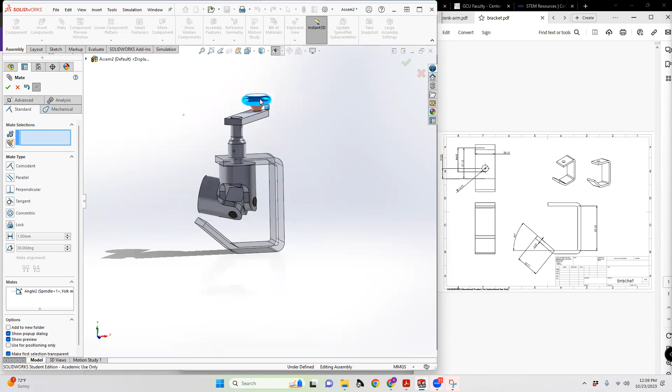Takes you a long time to get there, but you can, because it takes a little while for SolidWorks to catch up. So that's not a method I would recommend, because that can burn time. You can overshoot. You can just lose what you're looking for. Because if you tried to lock it at 40 degrees, this is why you want to be really careful with constraints on assemblies. Now look what it tries to do. As you rotate through the range of motion here, it tries to always maintain that 40 degrees. And that's obviously way wrong.

So if you then locked it in, so we'll get it back to something resembling, so I'm going to step out. That last angle reference we're going to undo, because you can always undo one, break one, and then put another one back and go, oh, that didn't work. That was terrible. You bring this face parallel. You could even do it with this back face. That would be fine. Then you're back to being able to rotate this with the full range.

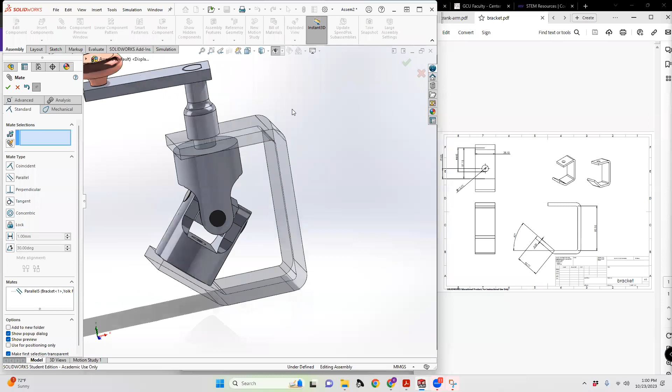All right. So that gives you a couple constraints on how to deal with a complex assembly, how to deal with tolerances, how to verify parts are correct, drawing multiple parts for an assembly, setting up dimensions, checking them, all of those sorts of things. So it's a lot of lesson, a lot of stuff, a lot of content.

What questions do you guys have, those of you that are still standing? And we'll end the recording here for the sake of brevity for the rewatch.